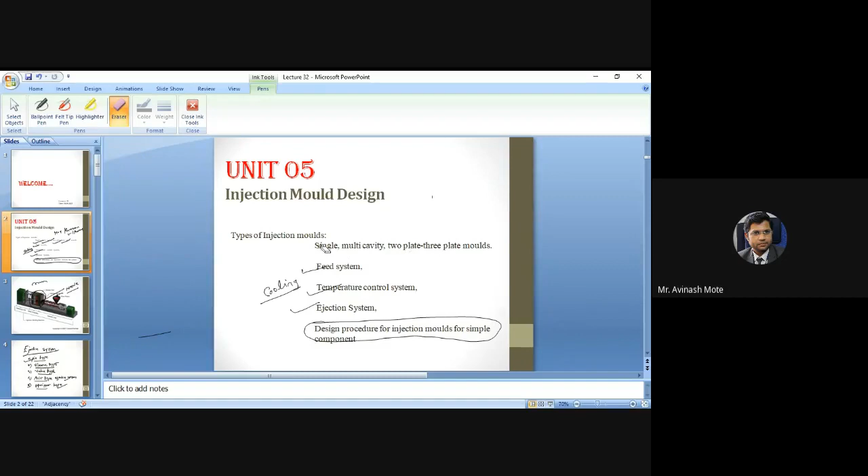Now this is the design part, design of a component. Before that, we'll have to see these types of injection molds: single or multi-cavity, two plate and three plate molds. Basically these are the types. We discussed one more type previously in temperature control: hot runner type and cold runner type. This we have already discussed. So currently we'll discuss single, multi-cavity, and two plate and three plate type mold, and then we'll go for problems based on this.

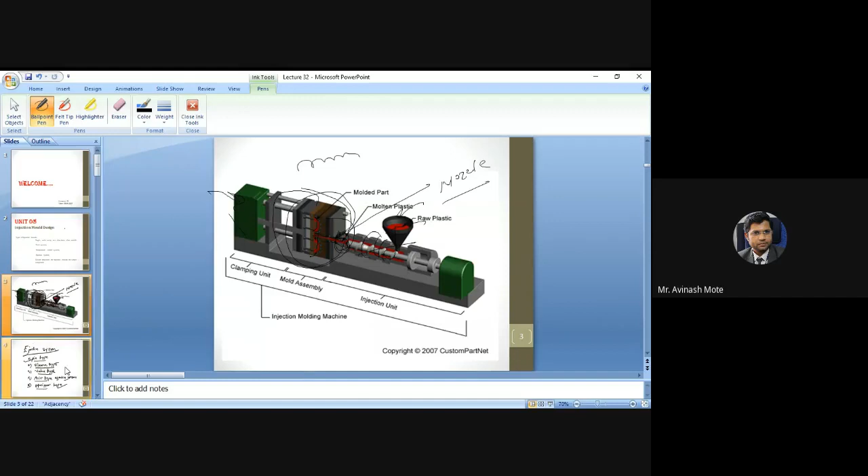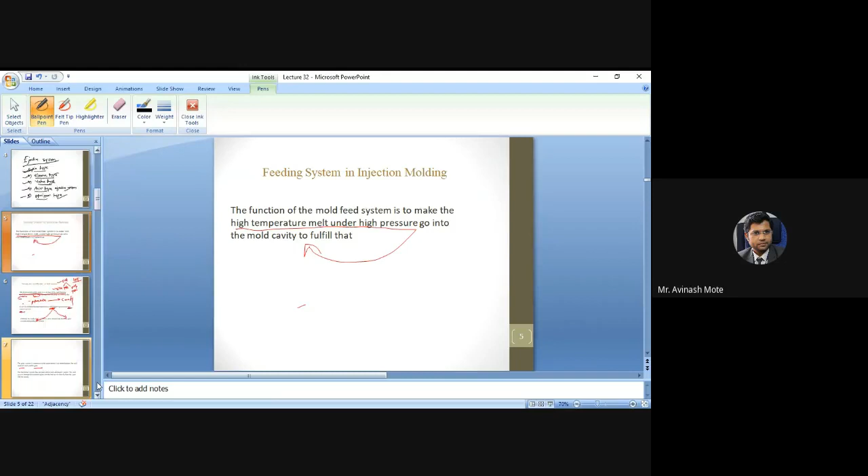These are the ejection systems in the injection mold: pin type, sleeve type, valve type, air type, and stripper type. That we also discussed in detail, so we'll not go again. Feeding mechanism also we have seen, feeding in the mold is important, and we discussed too many things about what kind of feeding mechanism should be there. This is the feeding mechanism. Sometimes you will have sub runners, activity runners, branch runners, multiple runners, depends.

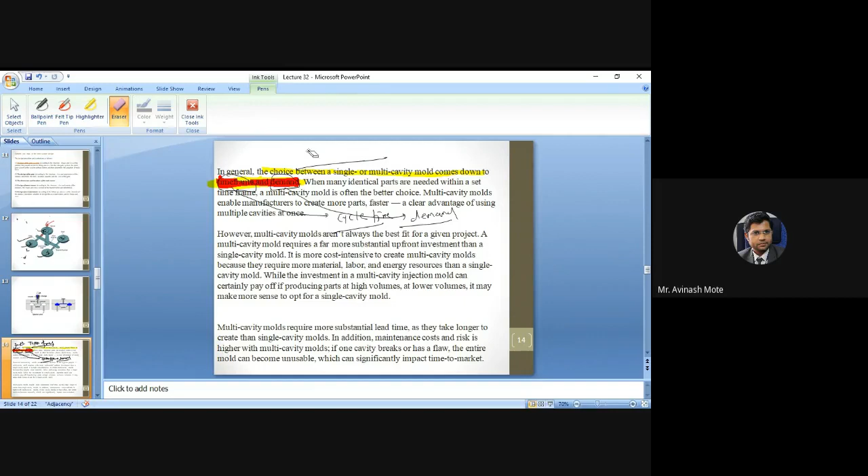And if you want that productivity in less period of time, in less cycle time, then you can go for the multi cavity. So it is totally a demand and time driven factor. If you need more number of products in the shortest time, go for multiple cavity, meaning you can manufacture multiple products at a time. When many identical parts are needed within a set time frame, multi cavity is preferred. Nothing difficult, simple thing: more products in shortest time, go for multi cavity.

Multi cavity means what? Simply, so many openings will be there, and at a time the raw material is provided to all. That's how the multi cavity works. So it is a clear advantage of using multiple cavity: manufacturing more number of products faster, in the shortest possible time.

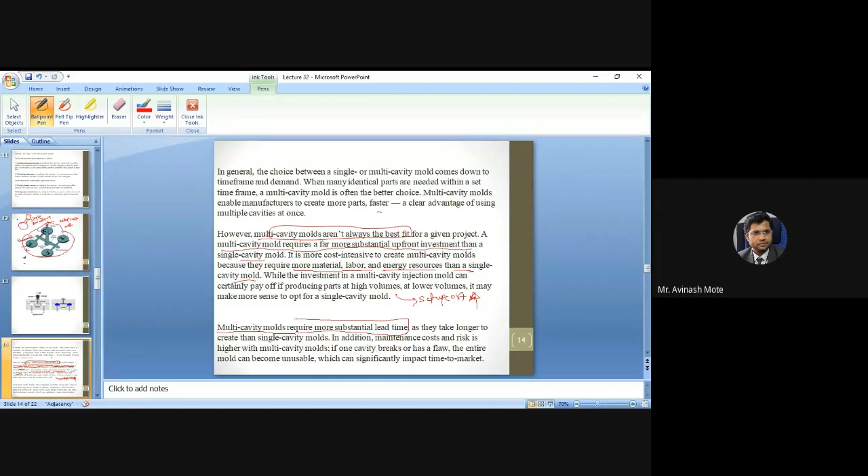Now third factor, multi-cavity mold requires substantial lead time. Lead time means what? Time required to fulfill the entire mold cavities. Simple thing: if you have only one opening, you can fill it easily in a short time. If you have 4 to 5 similar openings, you may need more time. Lead time means time required in advance before getting the products. So here lead time will be more.

Apart from that, maintenance cost and risk is higher with multi-cavity mold. Obviously, more complex setups will yield more maintenance.

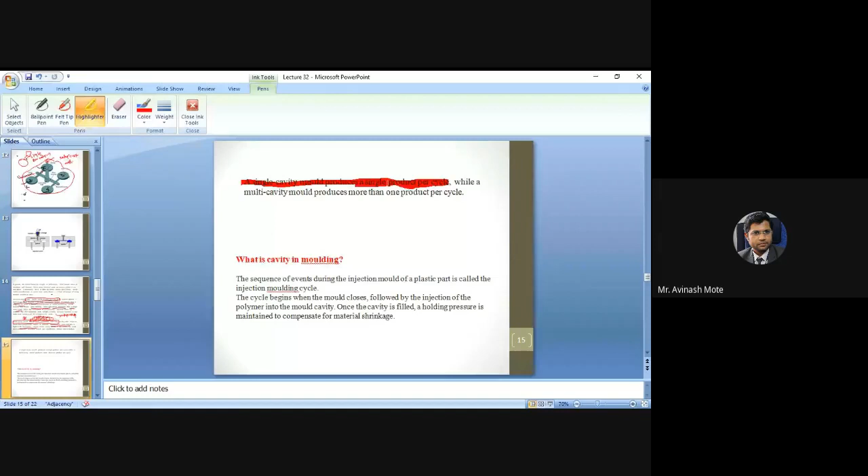Okay, so these are some of the pros and cons. A clear-cut definition is given: a single cavity mold produces a single product per cycle, while a multi-cavity mold produces more than one product per cycle. So that's what needs to be highlighted: single cavity means single product per cycle, and multi-cavity means multiple products in a cycle.

Cavity means what? Let me tell you. The sequence of events during the injection mold of a plastic part is called the injection molding cycle. So cycle time - two things I told you: time frame and demand. Time frame is nothing but the cycle time. The cycle begins when the mold closes, followed by injection of polymer into the mold cavity, and once the cavity is full, holding pressure

is maintained. So, what is cavity in the molding? I think the answer is quite different and the question is different. Just understand.

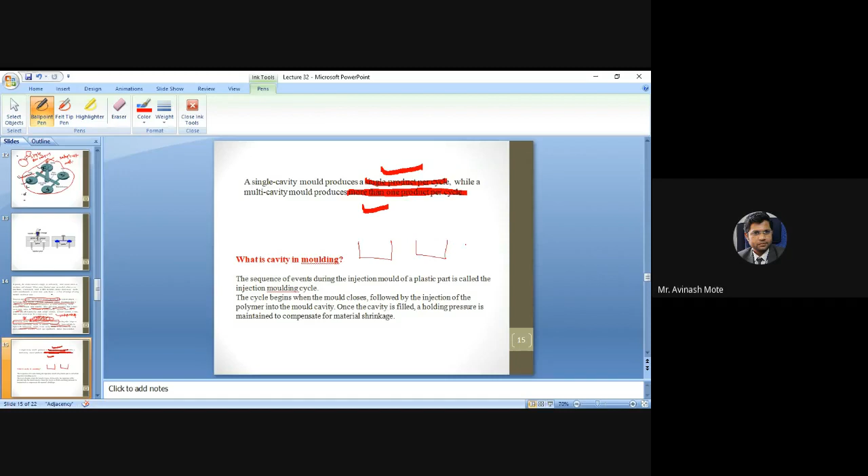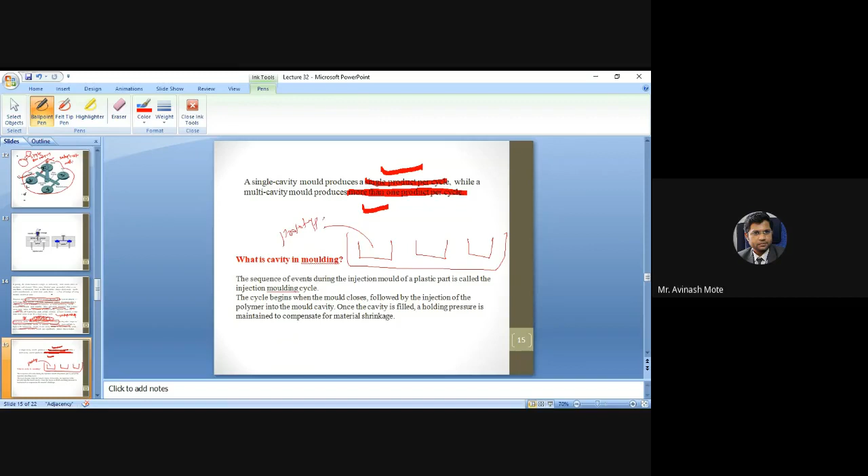This cavity means, because we are defining single cavity and multi cavity, cavity means these are the openings provided in the mold box. The openings are nothing but the prototype of the product. Once you pour the material inside this cavity, the material will be allowed to solidify and it will give the exact replica of the final product. So these are the mold cavities.

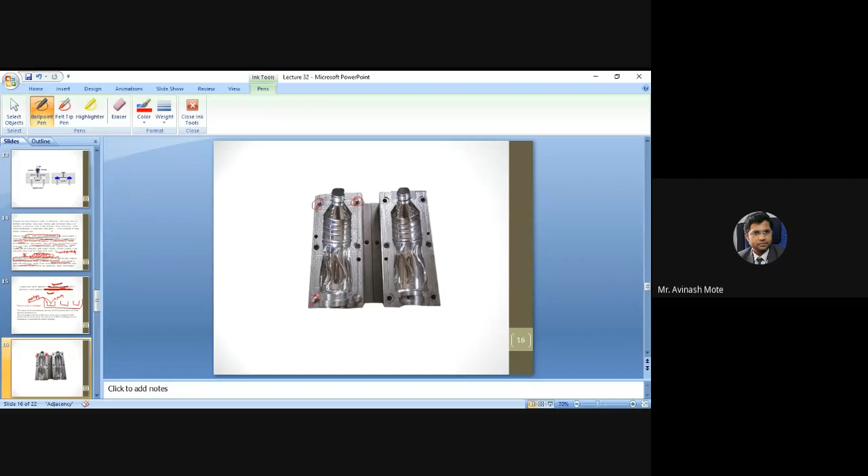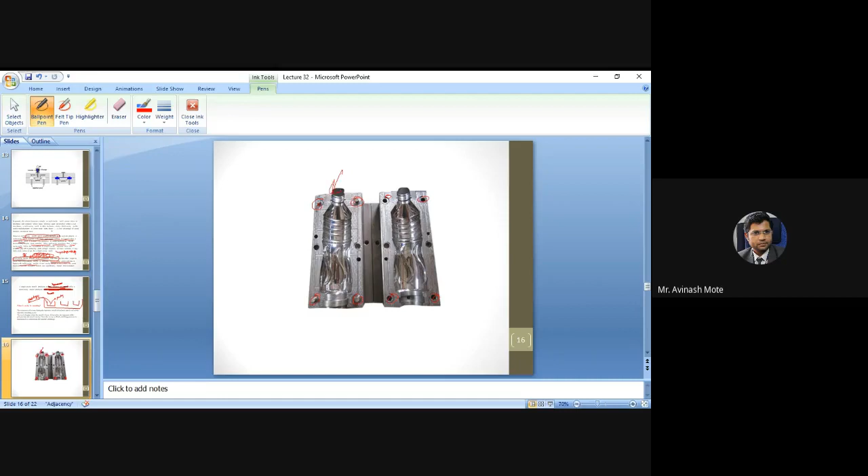So these are the two molds. You can close it - here screws are provided. And here the holes are there, right? So this is a single cavity type mold, because only once material will enter from this side, only one bottle is produced, and this is a kind of multiple cavity type - one product here, another product here, third product here, fourth product here.

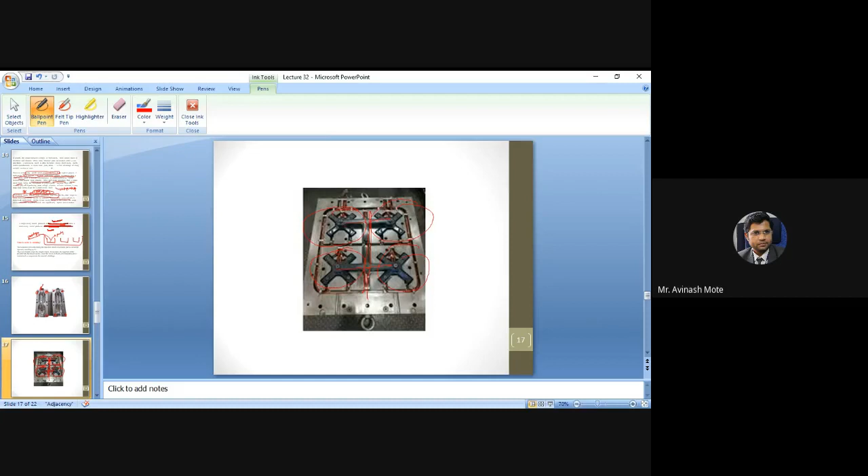So this is a central runner, these are the sub runners which are providing the material to the cavities. So this is called a four cavity mold. As such, there is no classification like two cavity, three cavity - only classification is single cavity and multiple cavity, or multi cavity. So this is a single cavity mold where at a time only one product is manufactured, and this is a multiple cavity mold.

So, pros and cons of multiple cavity mold. These are the pros: the desired number of products will be finished sooner because of the shorter lead time per batch. At a time you will get the products, so finishing will be also fast. You can produce more products with the same mold within a short span.

A four cavity mold has, in most cases, a lower total cost of ownership than four single cavity molds. Simple thing - rather than having one mold, one machine, here is one machine, a second machine for the second product, third machine for third product, and fourth machine for fourth product. So if you are manufacturing products by single cavity setup, you need four machines to manufacture four products. But with a multiple cavity setup, you can go for a centralized runner with sub runners, so one setup will satisfy everything.

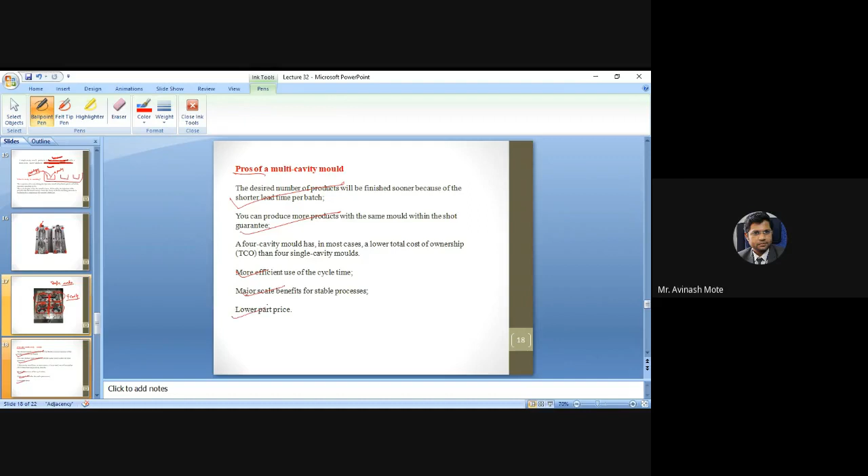More efficient use of cycle time - obviously, in a short, decided, defined time, you are getting more number of products. Major scale benefits for a stable process and lower part price. What happens actually? Simple thing: in a particular amount of time, if you are producing 10 products, and in the same amount of time, if you are producing 20 products, obviously those 20 products will have less cost, and the 10 products will have more cost, because cycle time is more and time is going to be cost in terms of money.

So simple, these are the parameters. Obviously stability of the balancing part will be good in case of the multiple cavity.

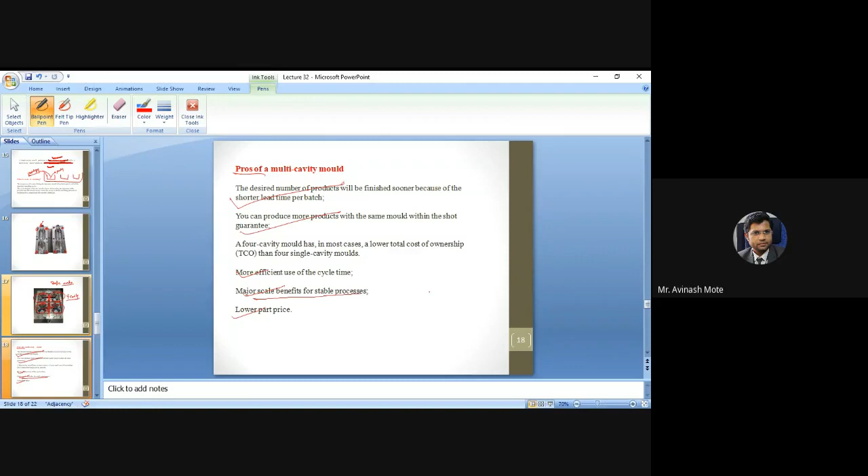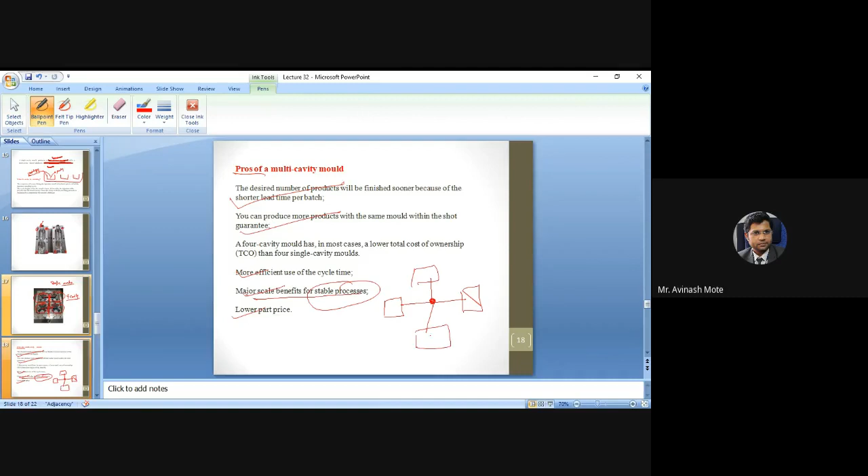Just some important issues with respect to this point. See, this is the central sprue, this is one runner, second runner, third runner, fourth runner. Here is one product, here is another product, here is third product, here is fourth product. So in this case, this is a balanced setup.

So here stability will be good. But same multi-cavity setup, one product here, another product here, and third product here - in this case, stability is going to be less. Simple, this is a mechanism, this balancing part you may have studied in theory of machine also. So here you will get good balancing, meaning stability of the process, but here balancing will not be proper. So possibly try for even number of products at a time.

Disadvantage of multi-cavity: one multi-cavity mold requires more substantial investment. We discussed it, initial setup cost is going to be more. Longer lead time for mold manufacturing - obviously the complex setup, so lead time is going to be more.

If there is any problem with one cavity, that's another major issue - entire mold setup is taken out of the machine. Suppose this is a multi-cavity: 1, 2, 3, 4. If there is a problem with this cavity, you cannot individually remove it. You will have to take out the entire setup and hold the process. You have to remove the entire setup and then separately go for maintenance of this particular cavity. You cannot remove this one and continue working with the other three setups. Entire setup is taken out, replace the defective mold, and then again restart the entire process. So that is one issue when using automated process to operate mold with a large number of cavities.

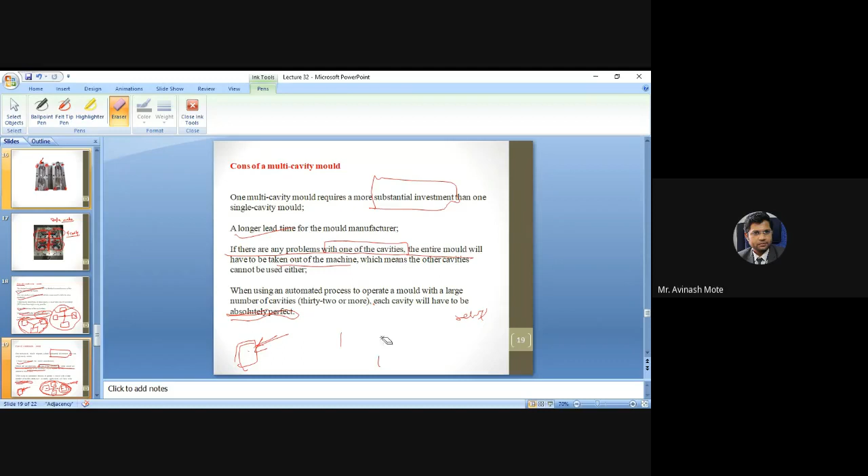When you are using only one cavity, the automation is simple because there is a fixed path. But if there are more cavities, the setup is required to be managed perfectly, because any irregular movement of any one cavity will disturb the entire setup. So automation will be hampered because more setups are working at a time - you have to manage the time frame and set up things properly. Here only one setup is under consideration, here four setups are under consideration at a time. So in case of multi-cavity, there should be absolutely perfect management for all the setups, then only automation is possible. In case of single cavity, it's very simple to go for automation, because you have a defined route, and being only one cavity, it follows the same route.

Next one - this is a same type of classification, quite different one: two plate mold and three plate mold. This two plate and three plate category you have studied in casting also in the manufacturing process. Rather than discussing it, I'll show you the figure, you will clearly understand. Two plate mold has a single parting surface - in case of two plate mold, there is a single parting line or single parting surface. Simple to use, most widely used. Two parts are there, one is a moving half and another is a fixed half.

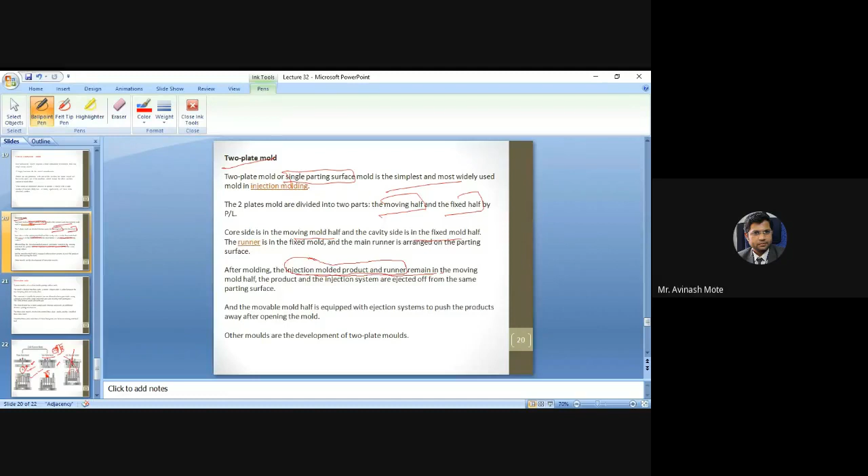After molding, the injection molded product and runner remain in the moving mold half. Here it is clearly given, both are there. And the movable mold half is equipped with the ejection system and pushes the products away from the opening mold.

Now in case of the three plate mold, this structure is suitable for products which are not allowed to have gate marks or runner marks on the side wall. If the product doesn't want any marks on the surface, then this three plate mold is preferred.

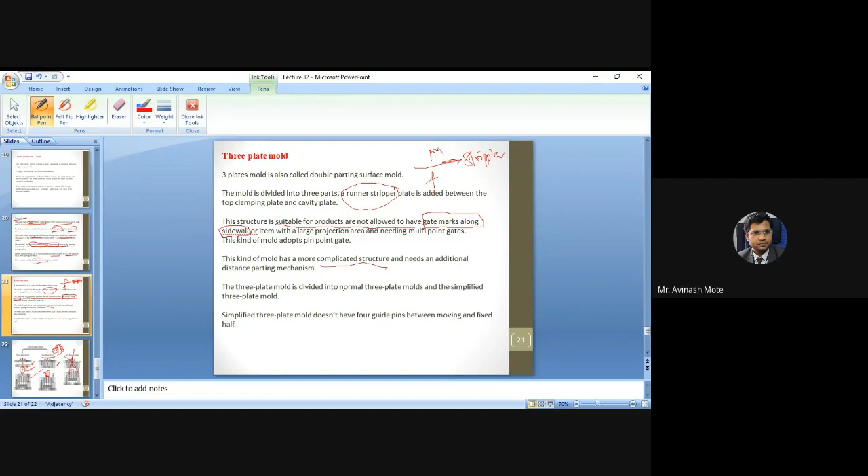Which are the three parts? One is moving, at the top; fixed, at the bottom; and in the middle there is a stripper plate. This kind of mold has a complicated structure. The three plate mold is divided into the normal three plate mold and the simplified three plate mold.

Just see the setup carefully, you will understand everything. So three plate mold, this is one, and these are the main plates, this one and this one. This is called the stripper plate, which gives access for the runner, and the material is passed through this point, so marks will not be there on this product.

And in case of the two plate mold, it is directly connected with this. Obviously the complicated setup will be there in case of the three plate mold, it is not there in the two plate mold.

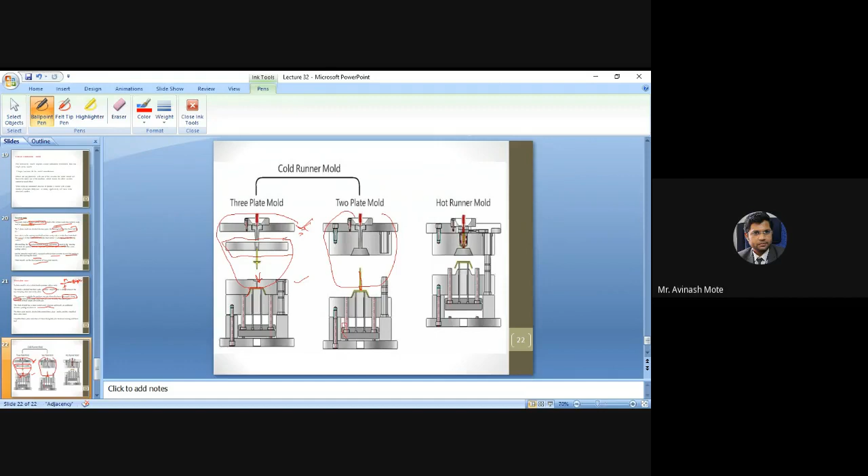And these are the ejection pins, these are the ejection base, and here is the ejection pin, one here, another here. So this central middle part is the ejection pin. I'll show it to you.

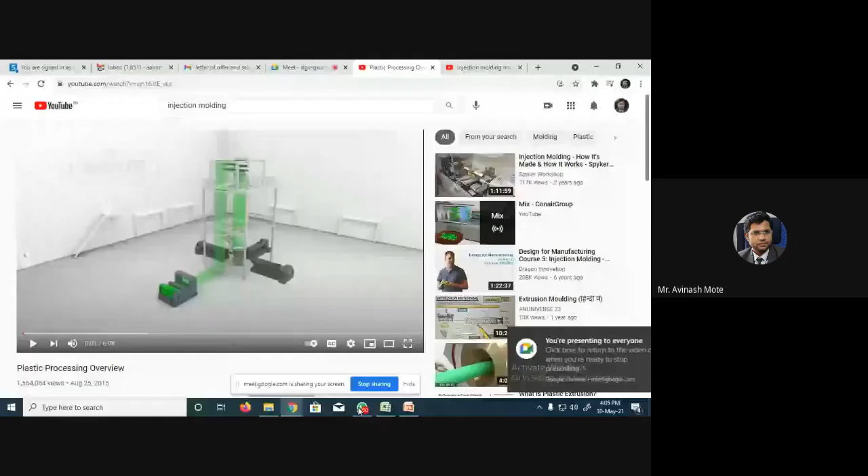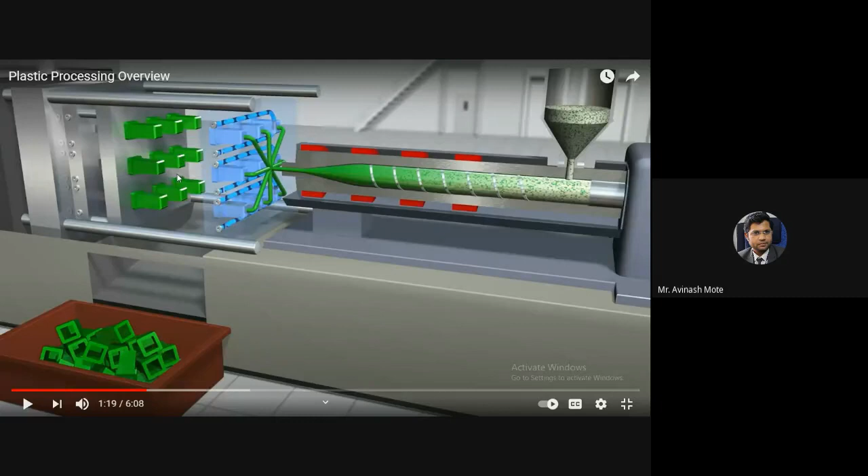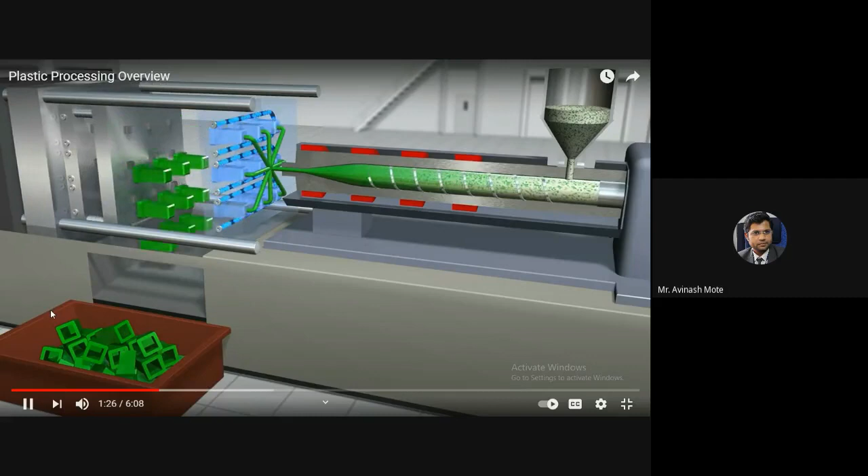So this is a multi cavity setup. Are you observing this many number of cavities? Here is the cavity, 3, 6, 9. Nine cavities are there, and nine products are manufactured at a time. You can check out the cycle time, very fast cycle, very less cycle time.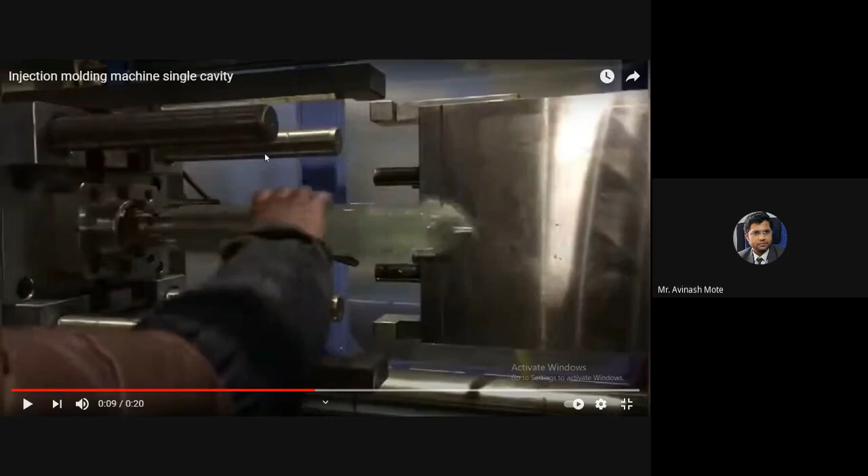This is multi cavity, and this is a single cavity. This is also explained nicely. Single product, only one single product at a time. Check once again, only one product is there. See the cycle time, how much time is required for manufacturing one product.

The same kind of product you can also go for the multi cavity, by providing multiple cavities you can go for multi cavities also. But as per the need of the product, the setup is followed, only one here.

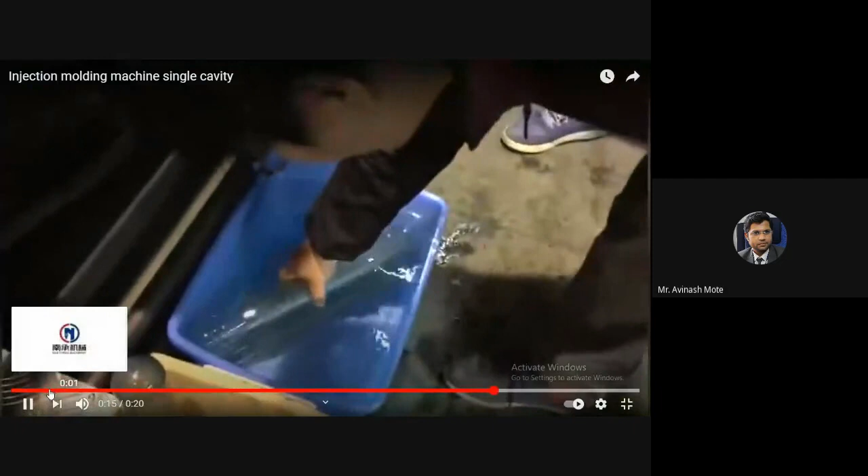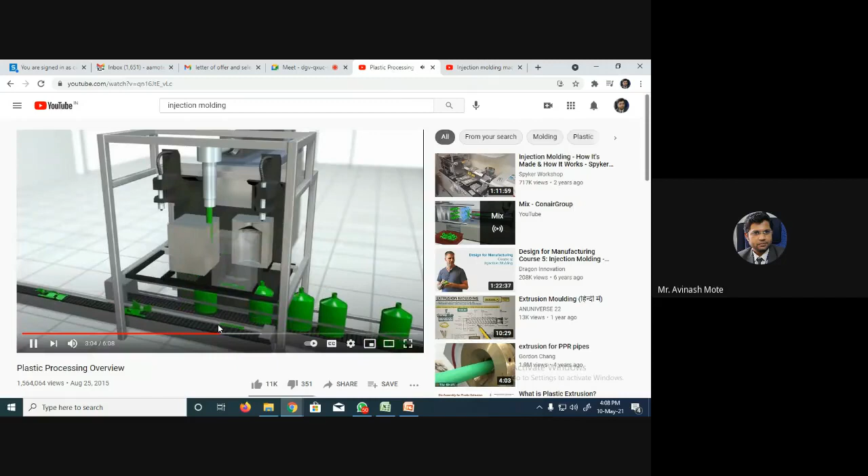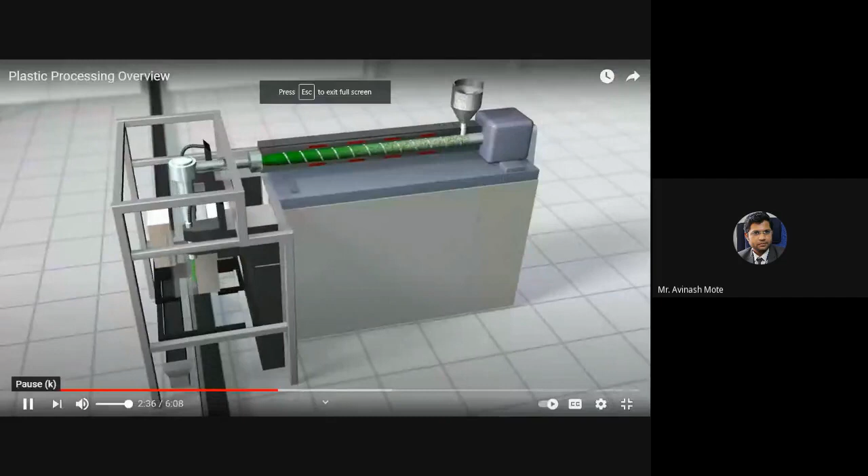I think we have seen this one. Look here, here is also one single cavity setup. The process is different, one single cavity, only one. In case of blow molding, mostly only one cavity setup is preferred.

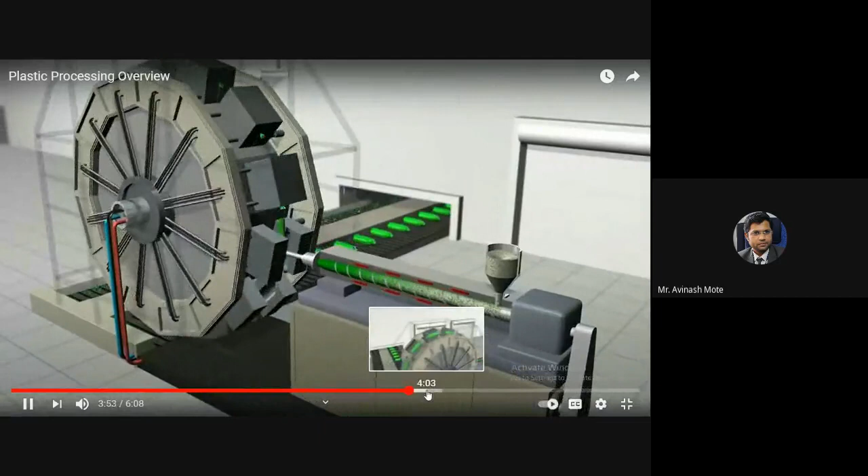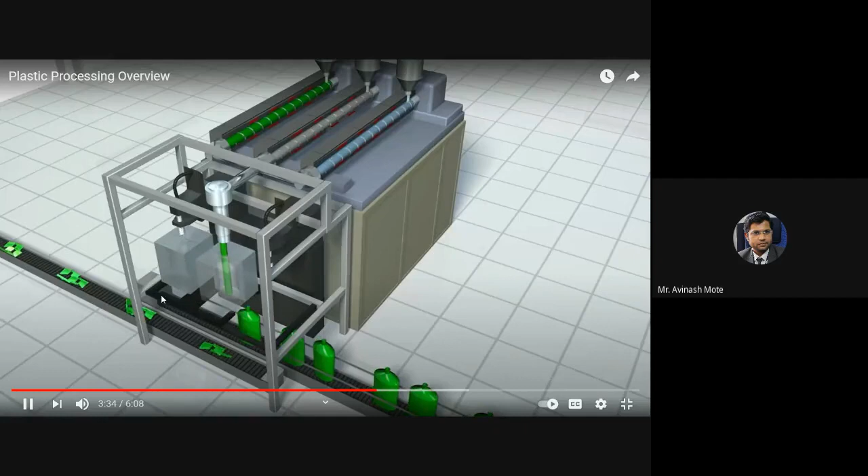Look here, the process is different but the concept is same. See, a single cavity type setup is there. Same product, single cavity setup. But if you can go for the multi cavity setup for this kind of product, there is an option.

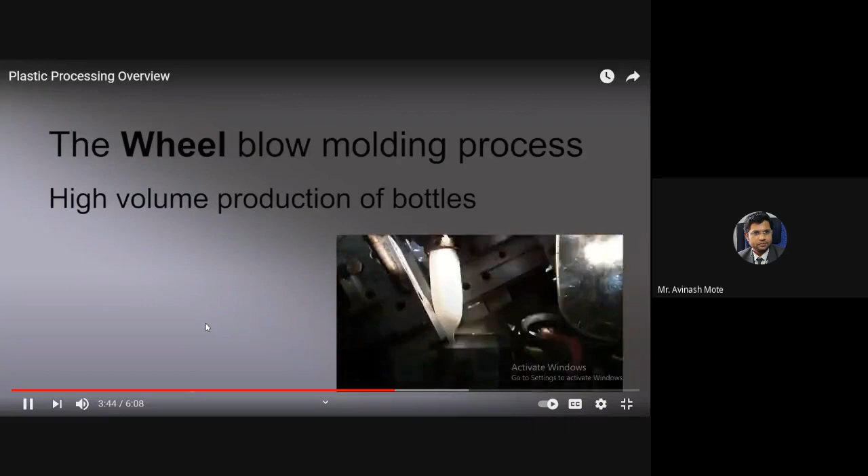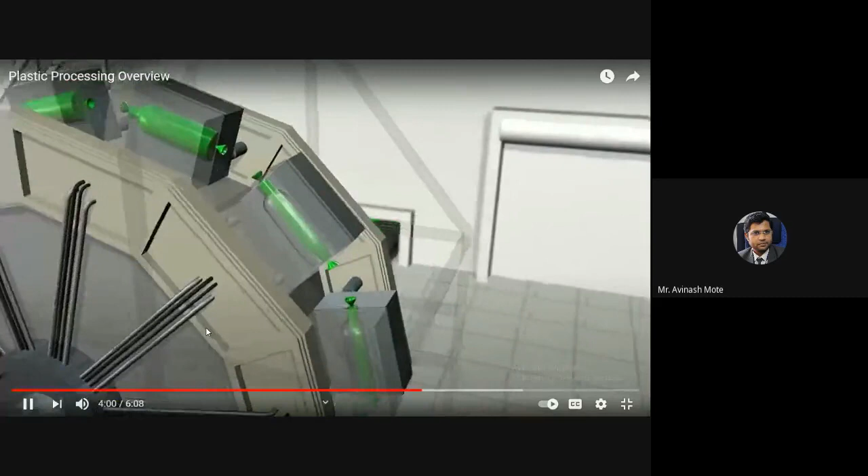This is a single cavity, and this is called a multi-cavity. Are you observing a different setup, totally different setup, but multi-cavity type? At a time you can get more number of products.

Okay, so similar concept, multi-cavity type. And this cold runner and hot runner, we have already seen in the last lecture, and this classification is based on the cooling mechanism. So these are the classifications for the injection mold.

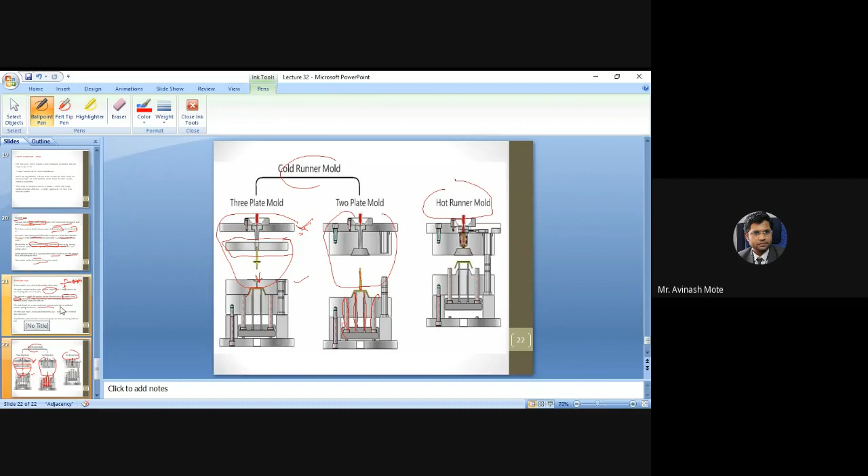A 3-plate mold has 3 systems: the moving mold plate, the fixed mold plate, and the runner or stripper as the central plate. The purpose is that when there is a requirement that the product should not have any kind of gate marks on the surface, then that time the 3-plate mold is preferred.

Okay, quality product you will get. In case of 2-plate mold, a simple setup, initial setup cost is also less, and only 2 plates are there: one is the top moving half and the bottom fixed half. Mold cavity will be in the fixed half and the runner and sprue arrangement will be in the moving half.

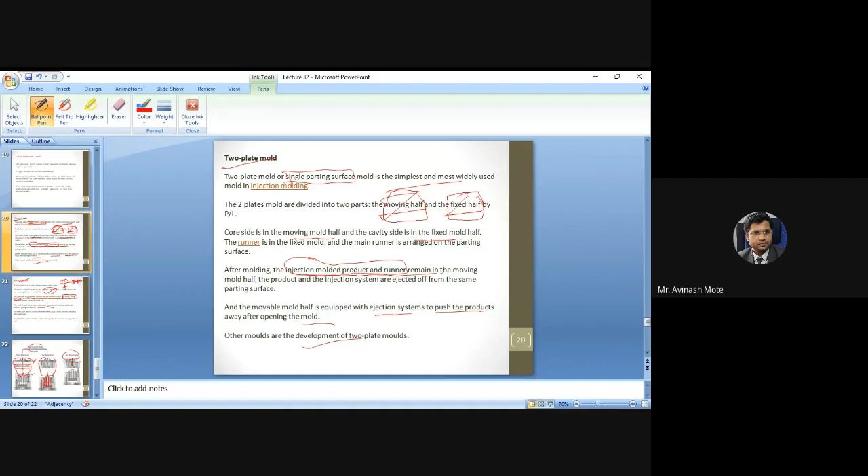Getting it? Okay, so here the marks will be there on the surface, so you have the option for that also, which is a non-facing surface, a secondary or back surface. On that surface you can put the gating system, so that it will not be shown on the top.

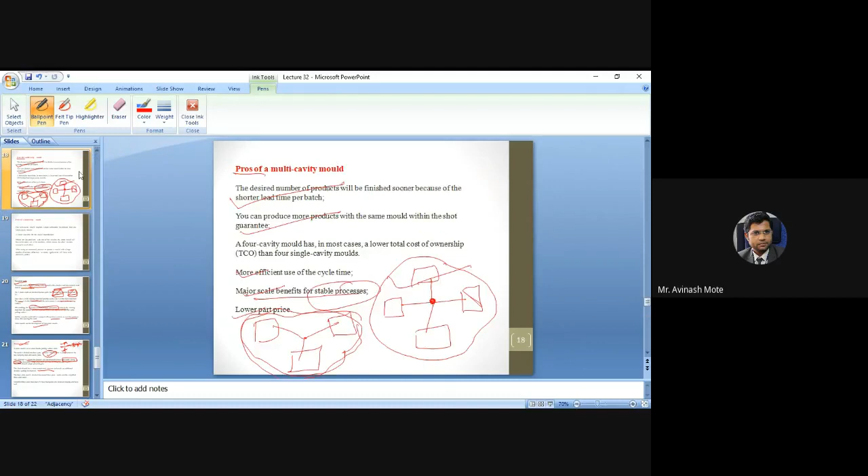Another one is single cavity and multi cavity. Single cavity is easy to set up, no skilled workforce is required, and initial setup cost will be lesser. Only thing is that productivity is going to be less.

But if the product is so large, one more point we missed - size of the product also matters. If product size is so large, you cannot preferably go for multi-cavity molding, because the entire mold size is going to be very high. So when product size is very high, it is preferred to have a single cavity mold design. When product size is very small, then you can go for the multi-cavity injection mold design.

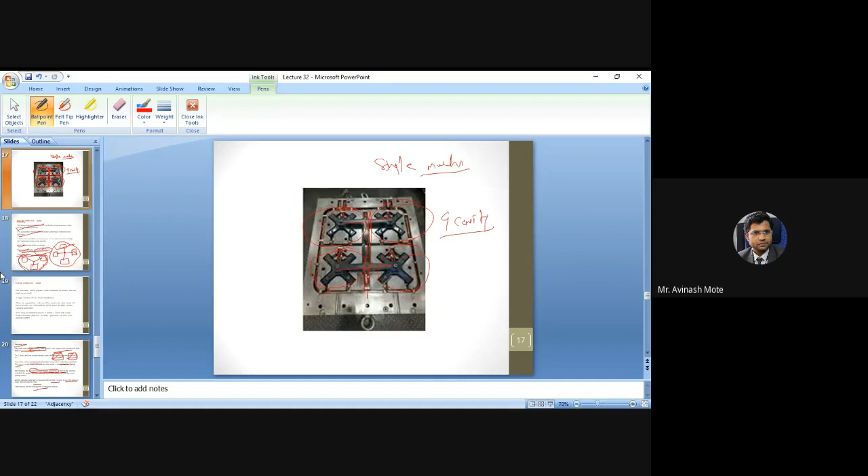For example, caps of a plastic bottle - a simple small size product, nothing precision or accuracy is required - so that you can go for the multi-cavity type product, right? So here also you can get the example.

Now this is a single product, but if you want such a product at a time, similar kind you can keep it from the other side also, same setup. One from this side, one from this side, and similarly another at the other end. A central runner will provide the material to both. So the same product we can go for both ways - single cavity type and multiple cavity type.

Just we'll have to ensure the size of the product. See what is happening actually - when there are multiple cavities in the product, material is coming through this central setup and then to the sub branches. So this time feeding rate requirement will be more.

What happens? Material will slowly enter into the cavity. Obviously there will be an equal rate, but material will slowly enter into all the cavities. So there is one problem that may happen - it is possible that because of the less input rate... if you are having only one cavity, material can be fed very fast because you have to fill up only one cavity. Here you will have to fill up 4 cavities, so material will enter slowly.

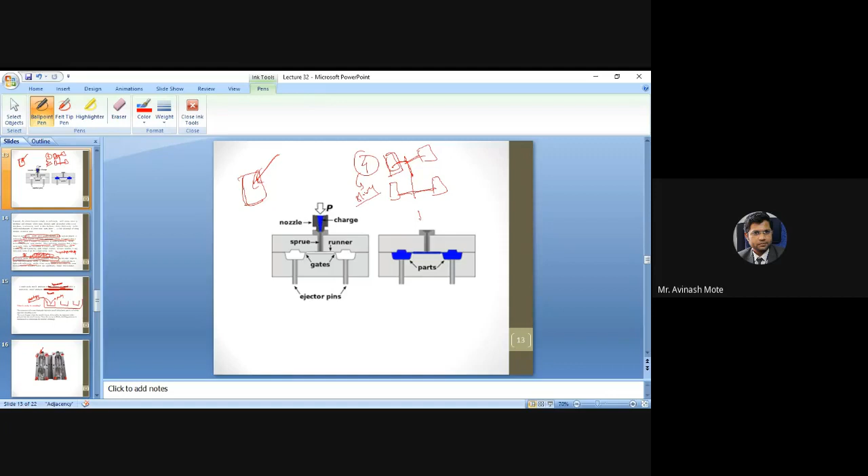Material is in a heated condition. If material enters slowly, it may be that - see, this is the component - at the bottom there's a different cooling rate, at the second level surface a different cooling rate, at the top a different cooling rate. Why is this happening? Because material is coming slowly. When material comes fast, the entire cavity can be filled at once, and uniform cooling rate can be obtained. But this is quite difficult in case of multi-cavity.

So when product size is small, prefer to go for multi-cavity. When product size is large, prefer to go for single cavity. Are you getting why I am telling that small size products are preferred with multi-cavity and large size products are preferred with single cavity? Because of difference in cooling rates. In depth, if you think, you will get this kind of answer, right?

So this is what about the classification of the injection mold, or the types of the injection mold.

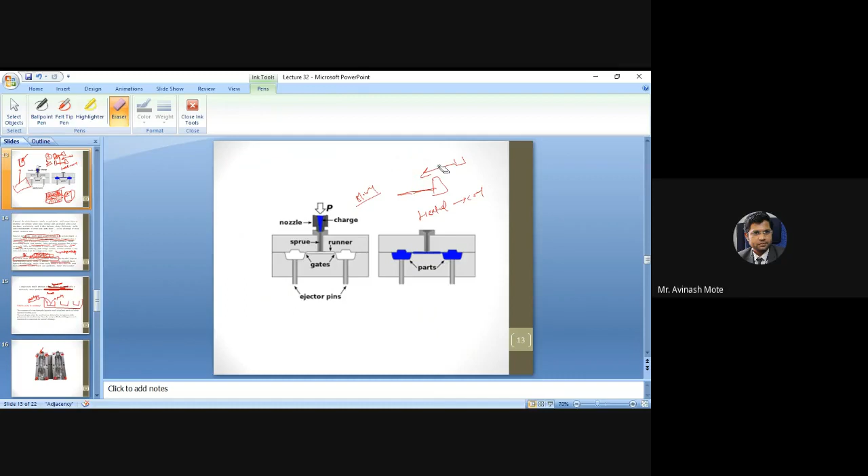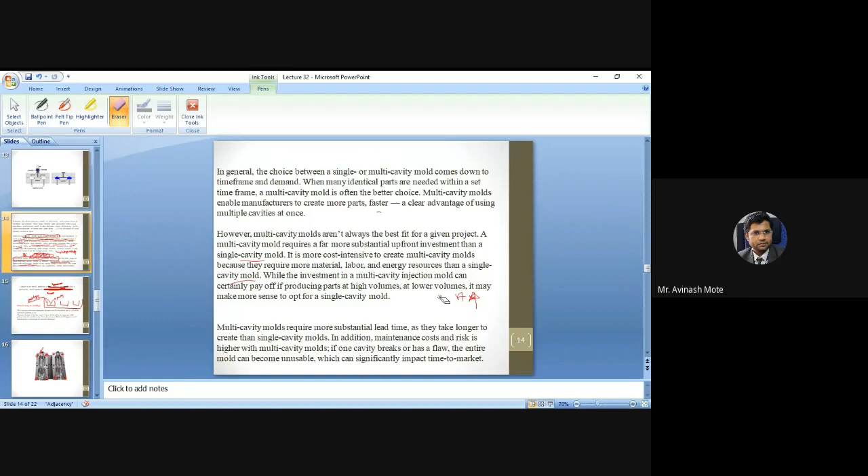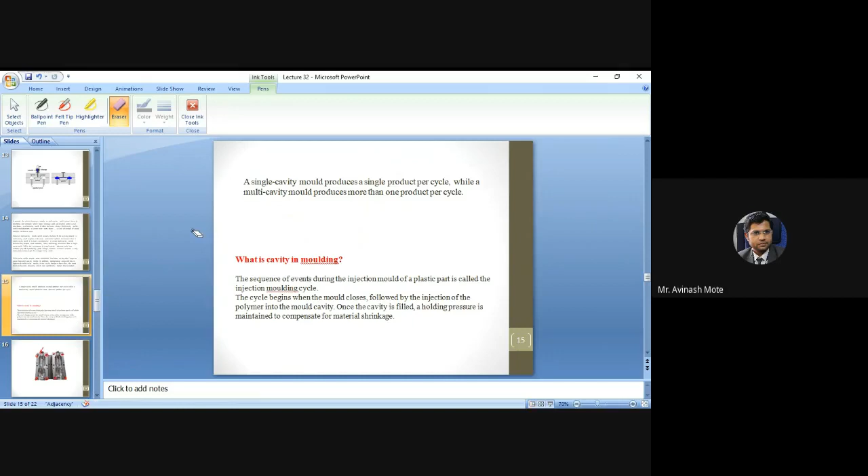So in your exam, if the question is about types of injection mold, try to mention all the things at a time: single cavity, multi cavity, 2-plate, 3-plate, and hot runner type and cold runner type. Because all these types are there for the types of injection mold.

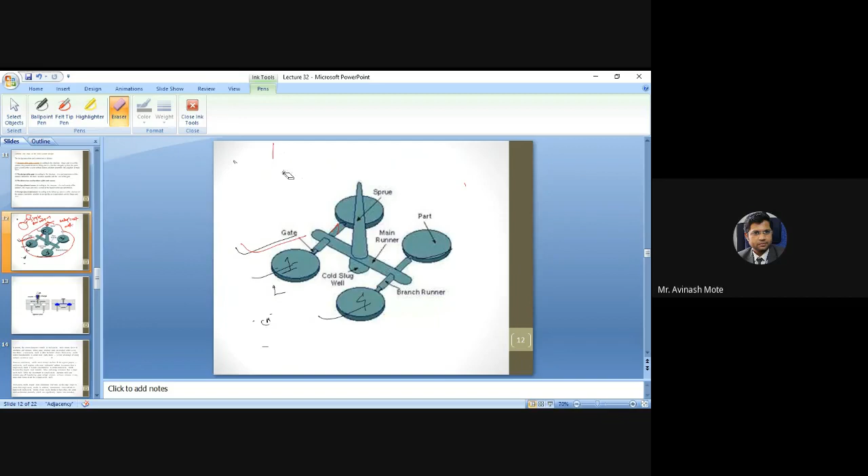So this is the type of multi cavity.

Now we are done with single cavity, multi cavity, 2-plate, 3-plate mold, the feeding system or feeding mechanism, temperature control system or cooling mechanism, and the ejection system with 5 types of ejection system - that's what is there in the theory. Now we have the next part: design procedure for injection mold for a simple component. We will discuss that in the next lecture, where we will see the formulation and a problem based on that. Getting it? Okay, so for today we'll stop here.